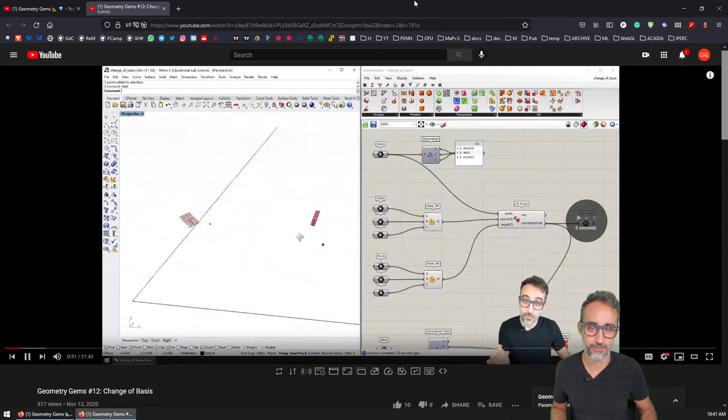And let's take a look. All right, so we did an intro, and then I had some drawings about what I wanted to explain. Yes, and then we just did it in C# scripting. Okay, so we can do that. All right, so then let's go to the whiteboard, and we're going to unitize a vector. So we need to draw a vector, and then how can I explain that?

So we have a vector, right? Like this, something like that. And that vector has three coordinates, which are going to be this one, and this one, right? So if we have a coordinate system like this, and like this, then it turns out that this vector has some kind of coordinates in this local system, correct?

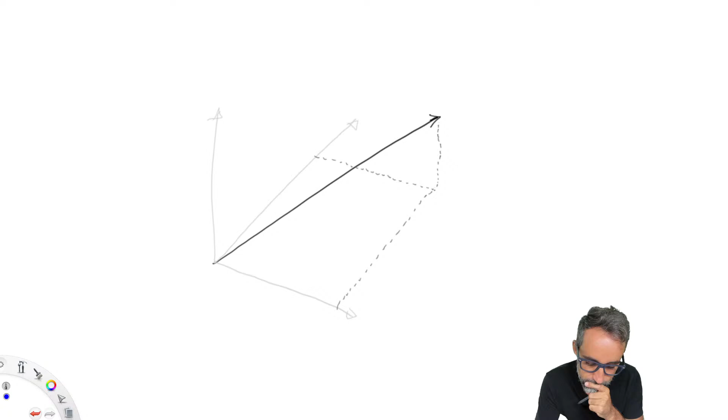And those are going to be the Z coordinate, so that's going to be, what is it going to be? It's going to be Z, and then this is going to be X, and this is going to be Y, right? Which is kind of weird to plot it that way. Am I liking this? So where do I want to go with this?

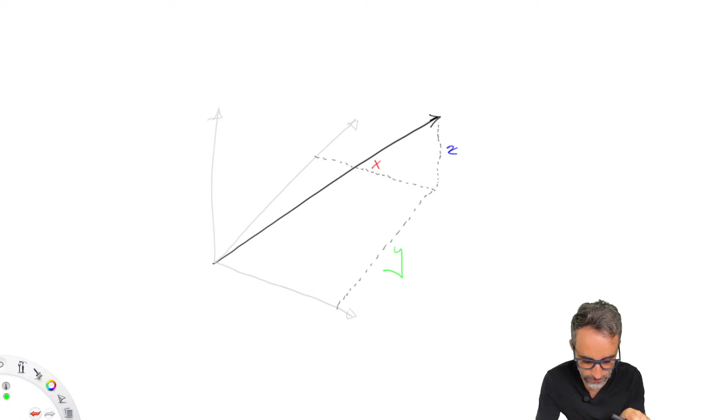So I want to say that it has particular coordinates, and then that the process is just as simple as figuring out the length of the vector. And once we have the length of the vector, creating a new vector where each one of the coordinates is divided by the length of the vector. Right? Do we have vector length geometry gems? Change of basis, distance between 2 points.

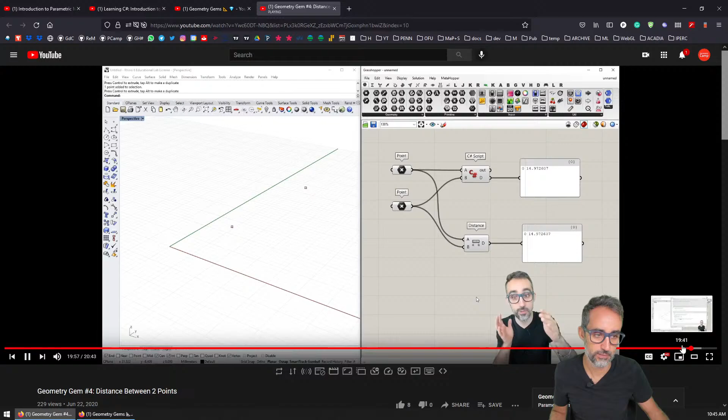We have distance between 2 points. I was inside of a square root. Maybe we should start with the vector length. Maybe that's not a bad idea. So let's start with calculating the length of a vector, and then we can move on to unitizing a vector.

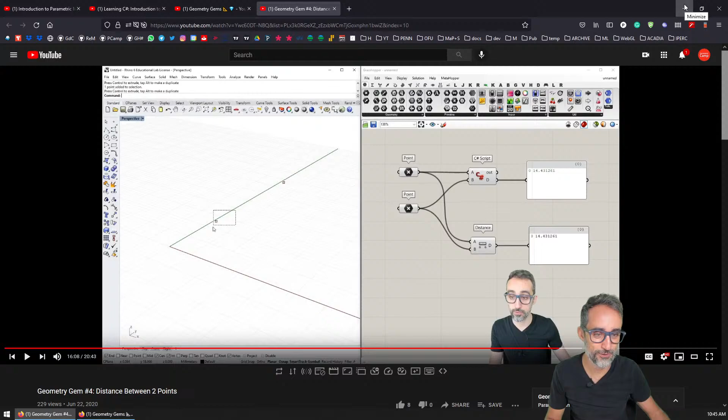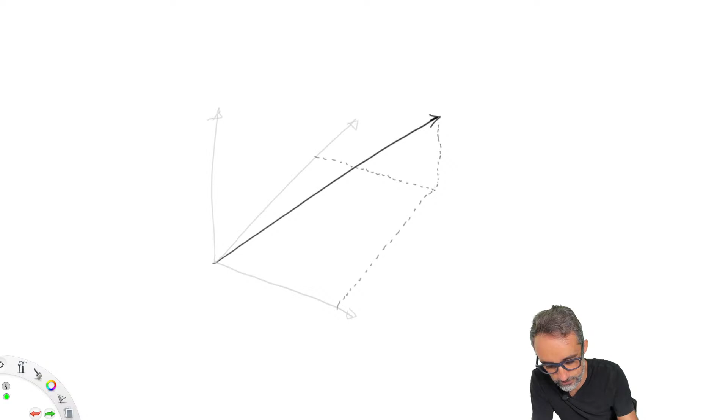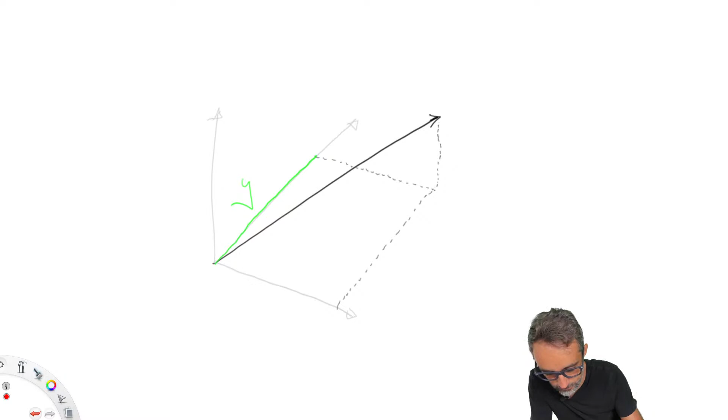Yes. So I'm going to go back here. And then I'm going to remove this. And then I'm just going to say that this is y. It's going to be the y coordinate. This is going to be the x coordinate. And then this is going to be the z coordinate. All right.

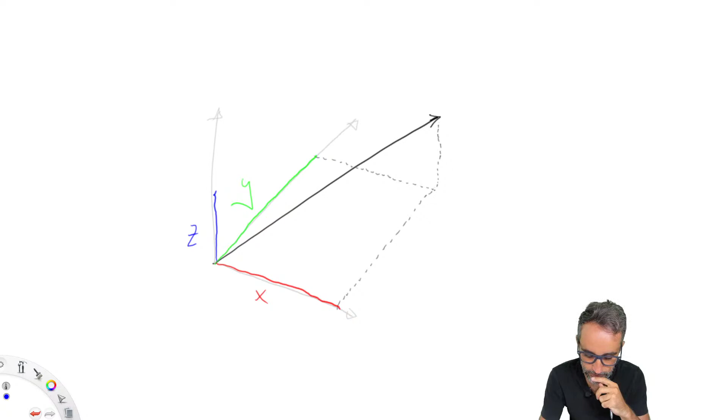And I would like to say that I'm a little fuzzy. You see why we need to go back into the mood, because I'm rusty. You stop doing this for a month and you get rusty all of a sudden.

Oh my god, I'm a little fuzzy, and this is being kind of boring, right? Okay. Let me start over again.

And then I'm going to do it with 2 dimensions. We have a vector, okay, and this vector has 2 coordinates. I have a vector, and the vector has coordinates, for example, x and y. And it turns out that those coordinates, if we place this vector at 0, 0, then those coordinates become x is here and y is here.

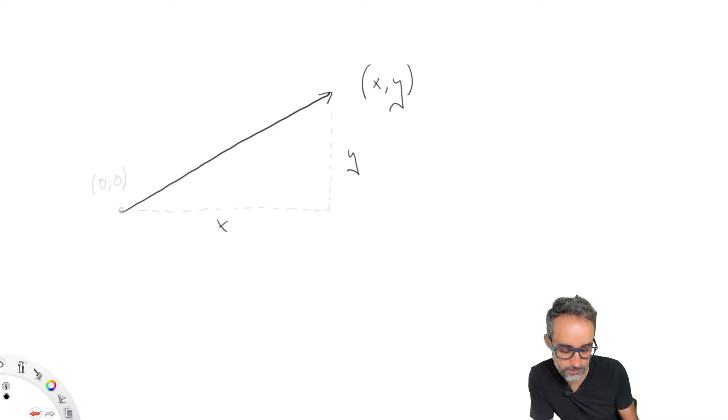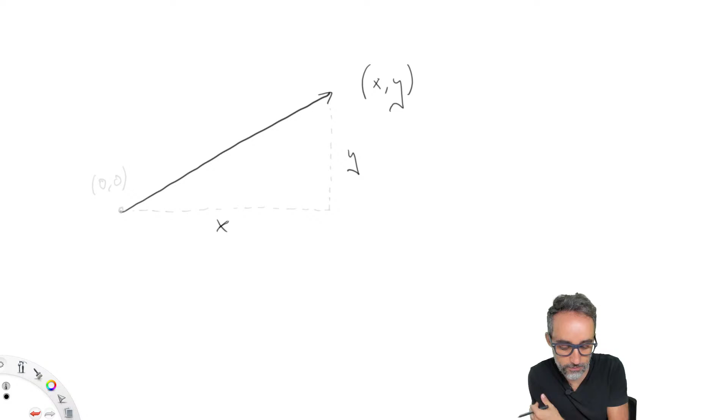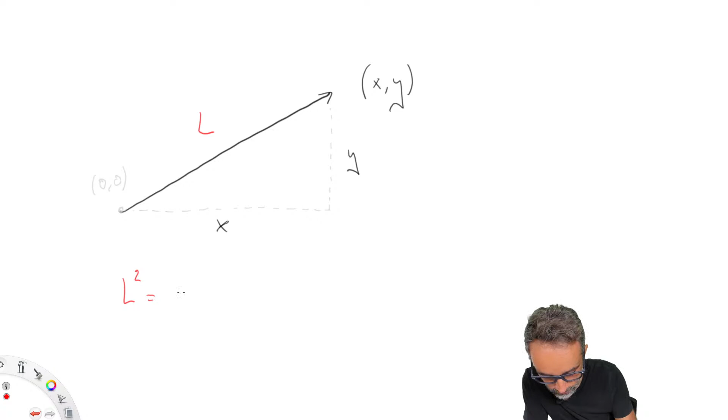And because of the Pythagorean theorem, we can see how, in order to find the length of this, it turns out that the square length of this equals the addition of the square length of the 2 sides, which means that the length of this object is going to be the square root of the x coordinate of the vector squared plus the y coordinate of the vector squared.

And it turns out that in 3D, this also works exactly the same. Oh, am I drawing on top of myself? I am. It also works exactly the same, x squared plus y squared plus z squared. All right. And it also

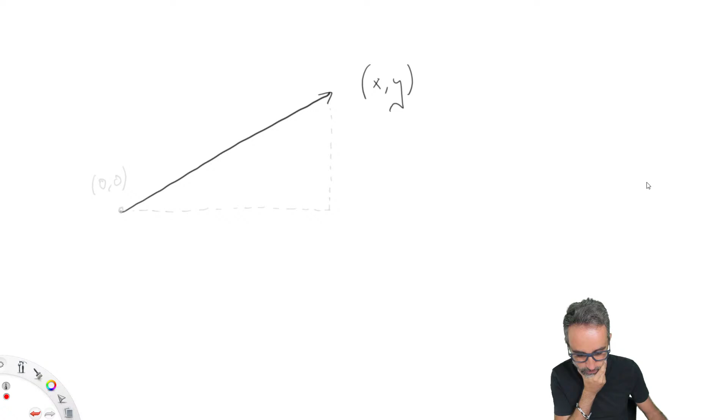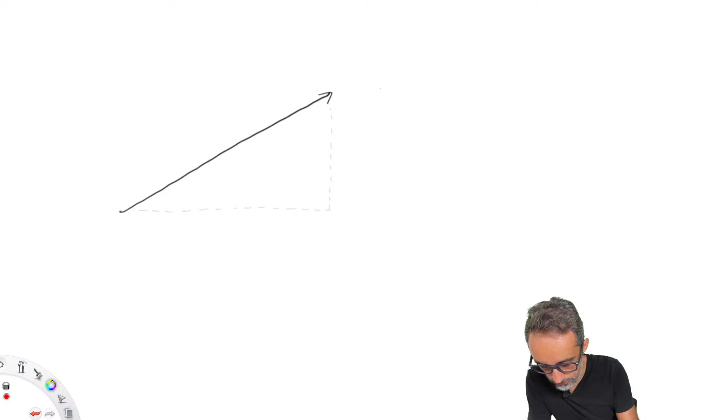Okay, so I'm actually going to remove this here. I'm going to delete this part here. And then I'm going to, where am I? Here. And then I turn this on, and I'm going to also remove this one here. And this one here. And I'm going to say that this is defined by x and y, and that is the same.

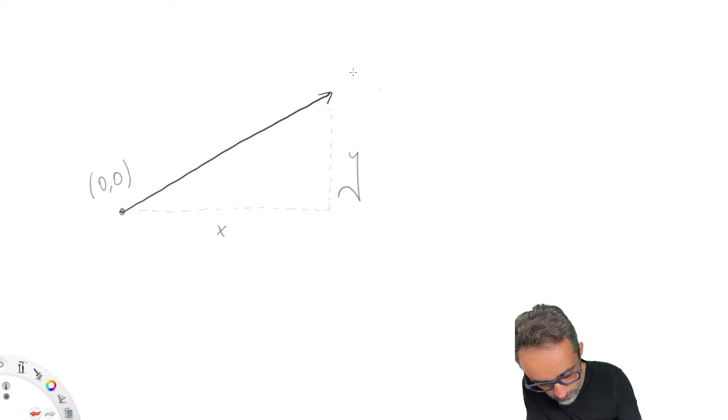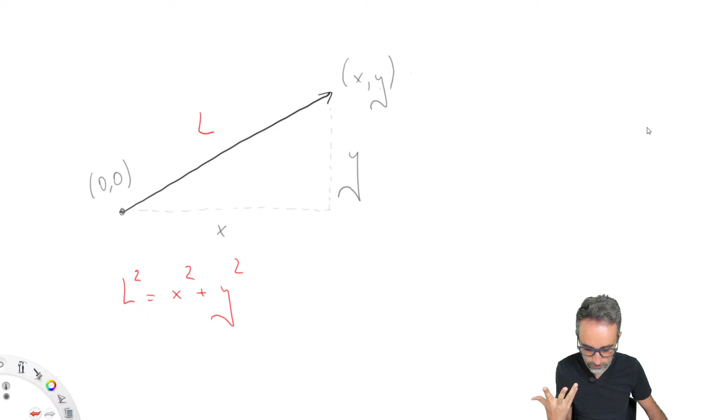This boils down to calculating the distance between 2 points that are on 0, 0 and x, y, for which we already have a geometry gem. And then after that, it's just as simple as saying, oh, no, we don't need this anymore. And then calculating the length can be as simple as calculating the distance between those two. But for the sake of making it easier, we're just going to the Pythagorean theorem.

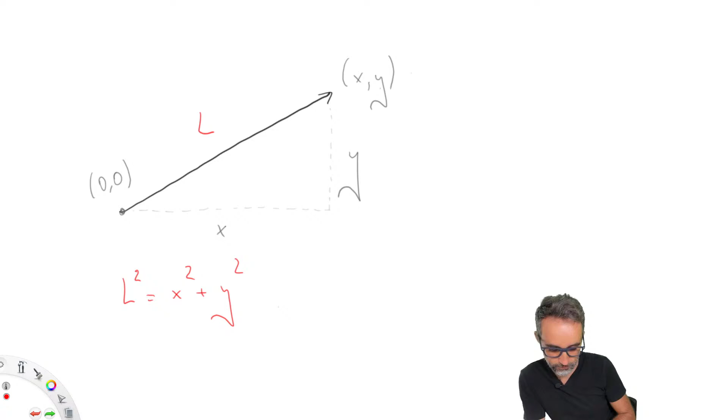All right, this is going to be extremely easy because it only involves applying the Pythagorean theorem in a very straightforward way. And let's think about that. If we remember, vectors are... starting over. I don't wanna start explaining what a vector is again. So let's start over.

Okay, this is going to be super easy because it's going to involve just very straightforward application. Starting over.

Okay, so this one is going to be super simple because it's going to involve simply applying the Pythagorean theorem in a very straightforward way. So let's take a look. If you remember, vectors are geometrical entities that are defined by the coordinates of each one of its components in three-dimensional space. So if we take a look at this case in two-dimensional space, we can see that if we have a vector with x and y components,

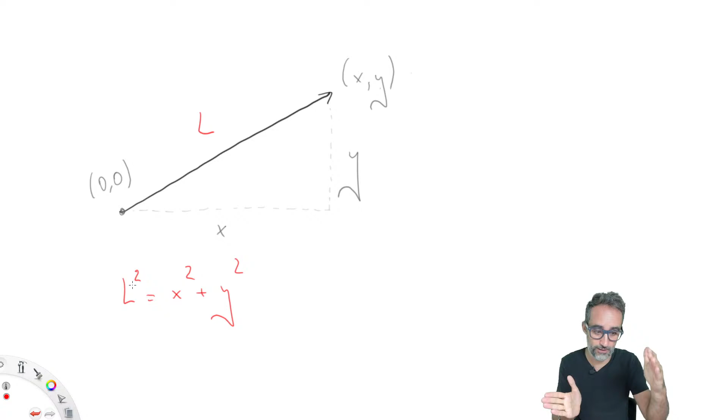So now you can see that what we have on the screen is a perfect square triangle. The Pythagorean theorem tells us that for square triangles, the square length of the longest side is equal to the sum of the squares of the smaller sides. So the square of the x coordinate of the vector plus the square of the y coordinate is equal to the square of the length of that vector. And therefore the length of a vector is the square root of the addition of the squares of both coordinates of the vector.

And this applies to 2D, but it also applies to 3D as well. If you have a vector in three-dimensional coordinates, you just have to add the z component to the equation. It's just as simple as that. So let's see an example of how to implement this using, in our case, C# scripting with Grasshopper. But this numerical relationship can be done in any platform or programming language you can think of. So let's take a look at how to implement that with code.

All right. Okay. So how do we implement that with code, right? That's a very good question. How are we doing? How's everyone doing? Oopsie. All right. So how are we doing? All right. So how am I going to prepare this?

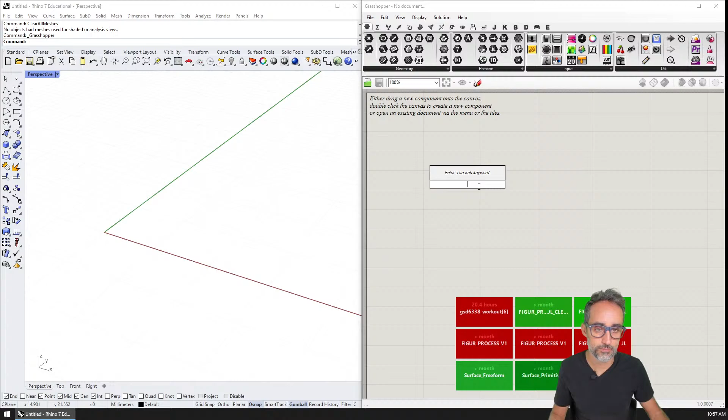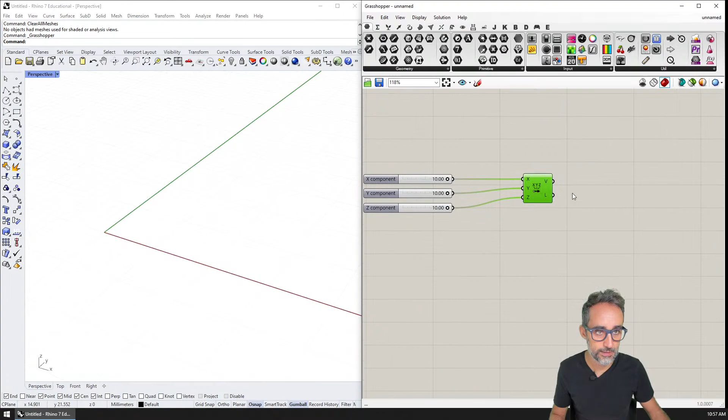So I'm going to drop here 3 sliders, for example. Those are going to be the x, y and z coordinates. And I'm going to create a vector from 3 coordinates, and then visualize. You're going to see that this vector is this vector here. And we're going to see also that the vector has this particular length here, which is already calculated by the component.

Okay, so we're going to visualize it just for the sake of it. Visualization here, anchor, and then a point in 0, 0. All right, we can see the vector there. All righty. And then what we want is to write a C# component that takes the vector and returns the length.

And so how are we going to do that? Should I do that in the video? I can do that while we are doing the video, probably. Yes. So let's do that during the video. All right. I'm going to save this somewhere. Geometry Gem 13, vector length.

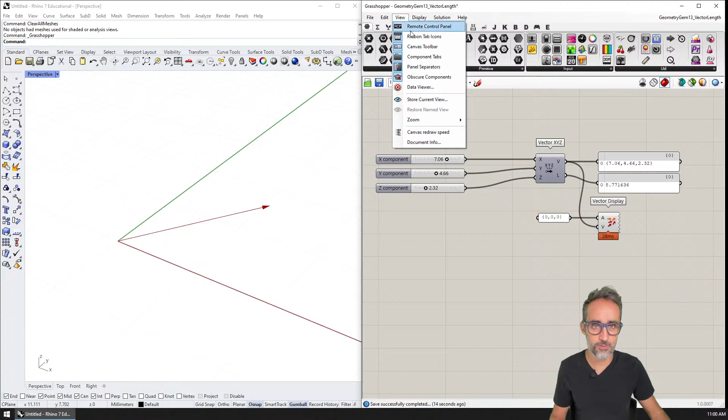Okay. Let's do this. Oh, and the bifocals thing. I actually installed something the other day. I've been getting a lot of suggestions from people from the community to use these other, maybe I don't have it installed. I was trying it somewhere. Well, I'm just going to use bifocals for the time being, but somebody gave me a suggestion for a really nice plugin to do the visualization part. Parachute. I think the one that I ended up liking was Parachute, because you turn it on and it works always, and you don't have to have a plugin installed. I can look that up later. Okay.

So I'm going to start now by explaining that we have the vector, we drop a component, we take each one of the components, and then we calculate the square root, and then we return that. And that's just as simple as that.

Yeah, you're right, Victor. That's multilingual, right? How awesome is multilingual? For all of you who don't know, multilingual is a component translation utility that Victor Lin has been working on for quite some time already. It's very, very nice. I contributed a little bit to that, to the Spanish translation, didn't I? Sunglasses is the one that I was suggested, but I did like Parachute better, I think.

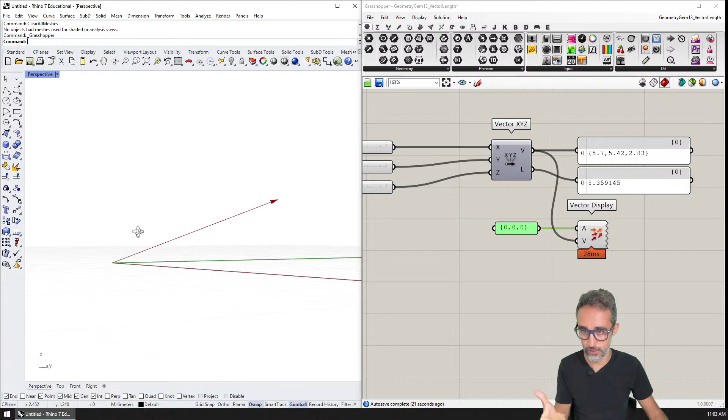Now, what's interesting is that the component in Grasshopper that creates vectors already gives me the length of this vector automatically. So this is going to be great for us to check if the computation that we're going to do is going to be valid. And then what we're going to do is create a C# script component that we're going to use to basically mimic this component here.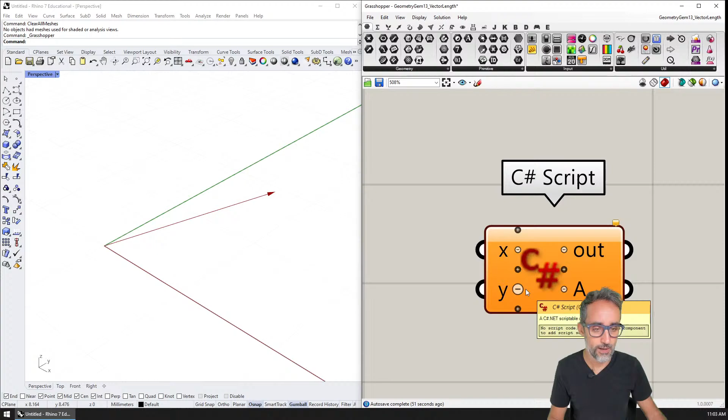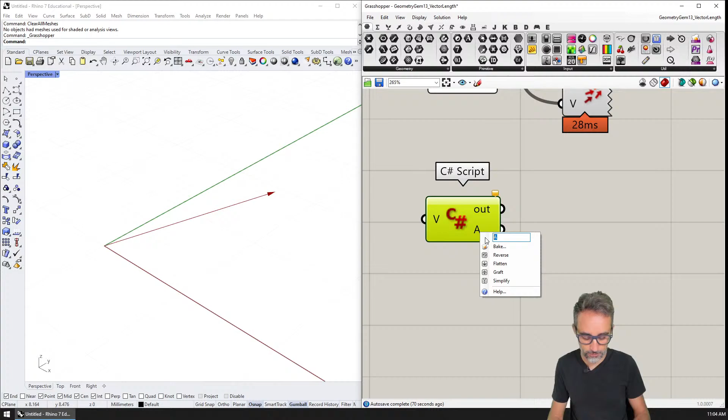So what I'm going to do is remove one of the inputs. I'm going to right click here and type V, and then I'm going to right click here and make sure that the input is of the type Vector3d, so that it is correctly casted. And then here the output, I'm going to right click and rename this output to length. So now if I plug this in here and input the vector, this component should perform the calculations to give me the length of that vector, which right now it's not doing. So now I'm going to double click here and open my C# scripting window where I'm going to implement that logic.

All right. And the logic is going to be super simple. The first thing that I'm going to do is write this very explicitly. I'm going to retrieve the vector coordinates by creating a variable of the type double, which is a number with a lot of precision, which is going to be called x, and that's going to be v dot, and then you see all the properties that show up. This is going to be the X coordinate of that vector. Then I can say double y is v.Y, and double z is v.Z. So now I have three variables that contain the values for the x, y, z coordinates.

Now what I need to do is compute the length, which I'm going to do by creating a new variable called length, and this is going to be Math.Sqrt. I'm going to compute the square root of x squared plus y squared plus z squared. Now, how do I square a number? Well, we could use the Math.Pow function, and we could say I want to elevate the value of x to the number 2.

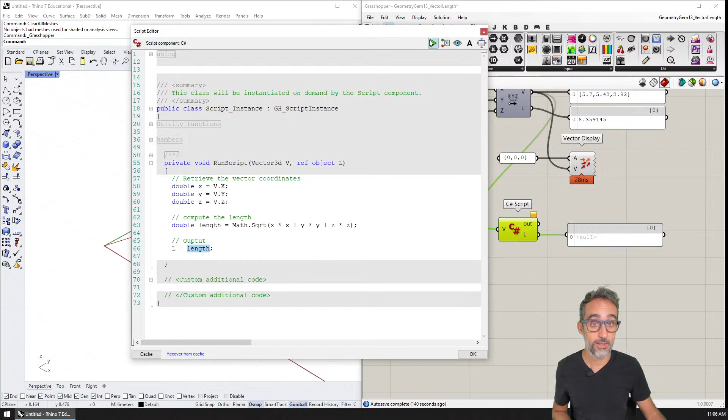Correct? And then once we have that length, then what I can do is I can output that value from the L object. So that's going to be L equal, the output of the component is going to be equal to that value that I just calculated here. And if I press play, you can see that, ta-da, the values actually match. And if I change any of the coordinates, those values actually match.

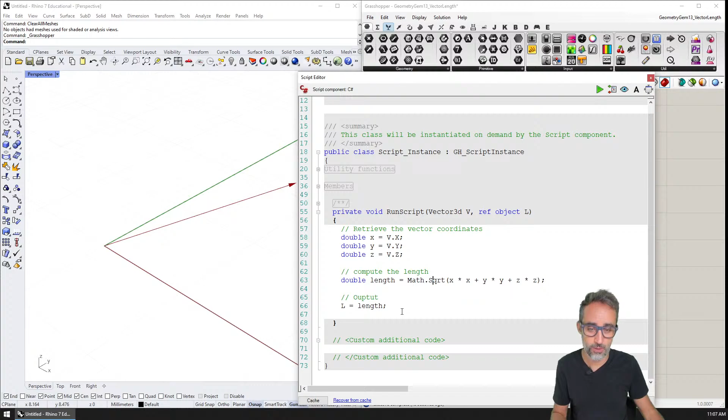All right. So that's it. It was just as simple as that. Now, because you know me a little bit now, I'm going to change the code a little bit to make it a bit more functional and nicer and reusable. So for example, I'm actually going to create a function that I can copy paste between my different pieces of code and that I can reuse.

So that function, I'm going to call it, for example, vector length. All right. And then that function is going to take as an input an object of the type Vector3d in this case, because we are in Grasshopper using RhinoCommon. If you're doing Unity, or if you're doing some other software, then the type of element will be slightly different. Okay. Now I'm going to name this lowercase v, for example. I'm going to open and close curly brackets.

And I need to remember that this function takes one vector and then returns a number with the length. So the return value has to be of the type double. And now inside of this function, I could basically just copy paste all of this and then say the return value is going to be length, and that's it. And then here for the outputs, I could say the output of L is going to be the result of calculating the vector length of V.

All right. However, quick thing, this needs to be lowercase because I renamed this argument as lowercase. So now this should work, no problem. All right. So that's great. I like writing very verbose, very explicit code when I'm doing these tutorials, but in case you want a little more elegant lean code, I'm not sure that's a good practice, but anyway, you could say, well, instead of retrieving this, why don't I just use them here right away?

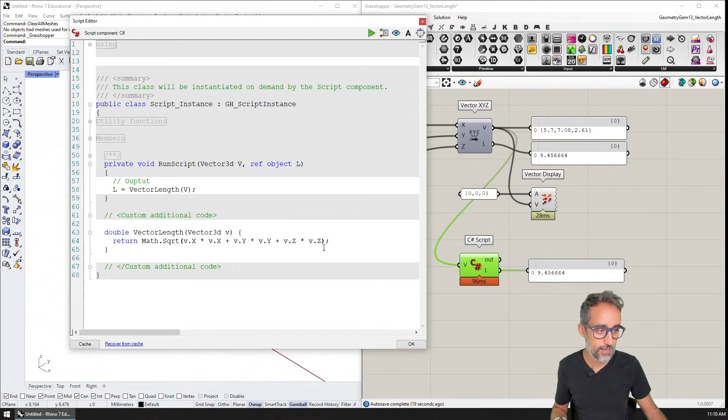All right. So I think that's all I had for today. And as you can see, this operation doesn't really need anything. This operation is just taking the coordinates and doing some arithmetic, some Pythagorean theorem with these values. If you wanted instead to use the functionality that is coming with Rhino and Grasshopper, then it turns out that Vector3d already has something that computes the length for you. So you don't have to write that on your own.

So this, for example, we could comment this. And then we could say, instead of that, I'm just going to use RhinoCommon's capacities and say vector has to have some kind of length property. So you can see here, there is a Length property that basically computes the length of this vector internally and returns that value. If I do that, that is also going to work. But in this case, now we rely on RhinoCommon to do that operation. In this case, we have manually done that operation ourselves.

Okay, so whichever way you find better. I like doing things myself very often, but I also don't like to reinvent the wheel every time. So it's up to you. Okay, but knowing where this comes from is very useful, in my opinion. All right. Thank you very much. This was how to calculate the length of a vector.

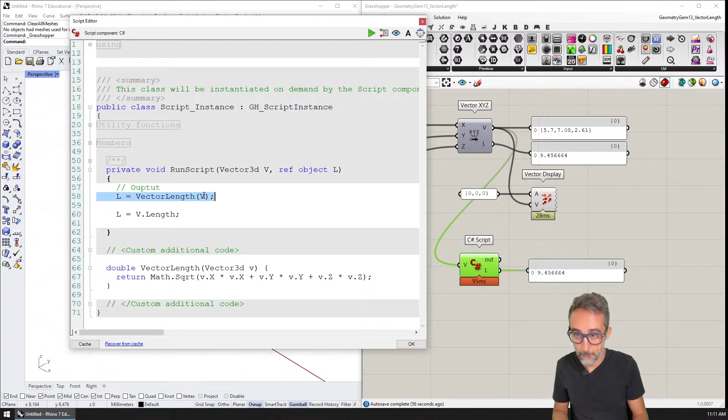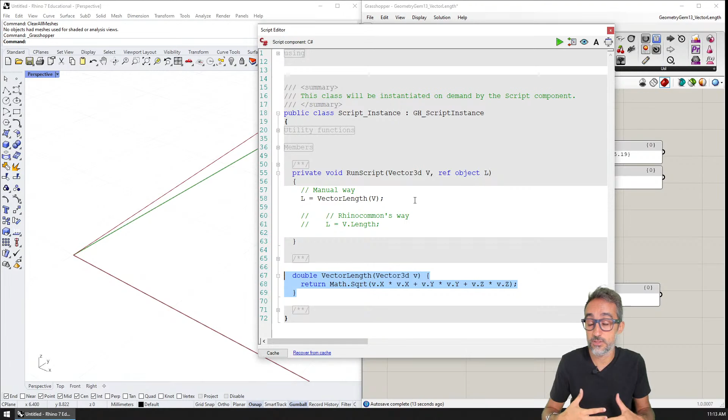Here I have a vector in 3D that I can control with X, Y and Z coordinates. Grasshopper automatically gives me the length, but I've written out what the algorithm to generate the length of a vector looks like, which is based on the Pythagorean theorem. Let's get hands-on. I'll first explain conceptually where this comes from, then how to implement it in computer code.

All right, so that was computing the length of a vector. The next thing we want to do was the other geometry gem: unitizing a vector.

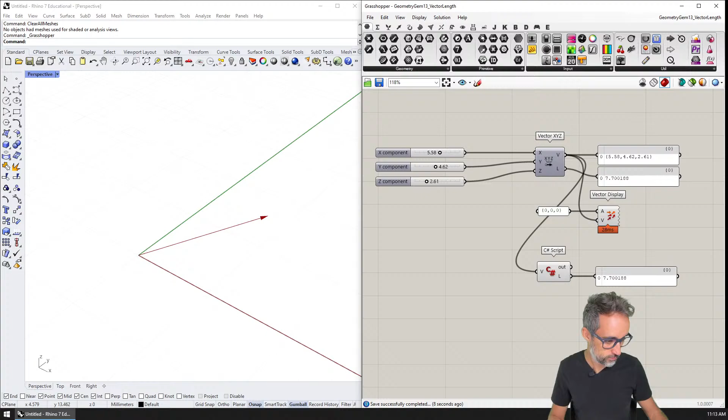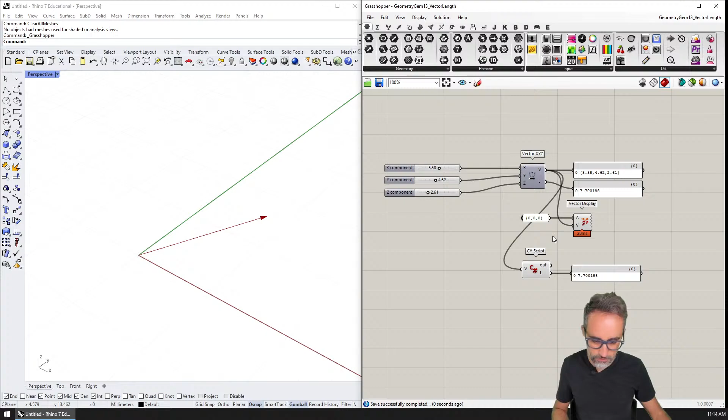Okay, so I may want to use this one. Okay. Let me save this and let me write myself a note here. Let me write myself a note here. That

All right, what else? We were going to do how to unitize a vector.

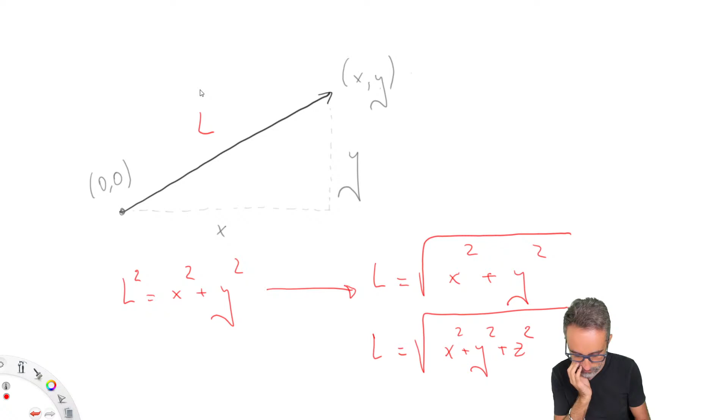I think I might just use this diagram, a similar diagram to this one. Okay, so let me just save this diagram here. And then let me make another one. Save. Wait. Save as. Okay. All right. So that. Okay. Here. Oops. Oopsies. All right. Where is the drawing thingy?

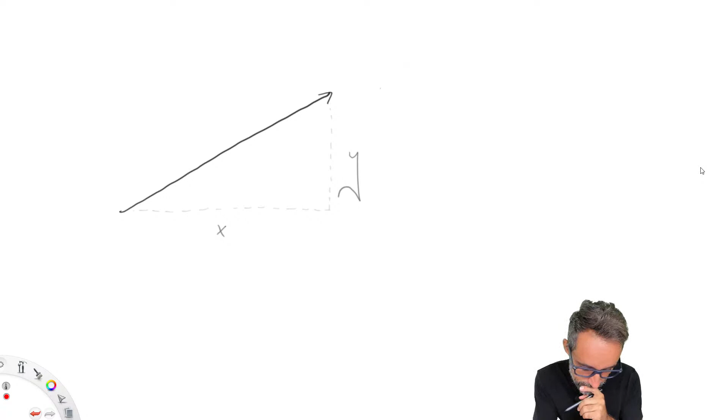How's everyone holding on? Is it hot wherever you are? Because it's very hot here in Cambridge today. The weather has been super nice, and now today it's not great.

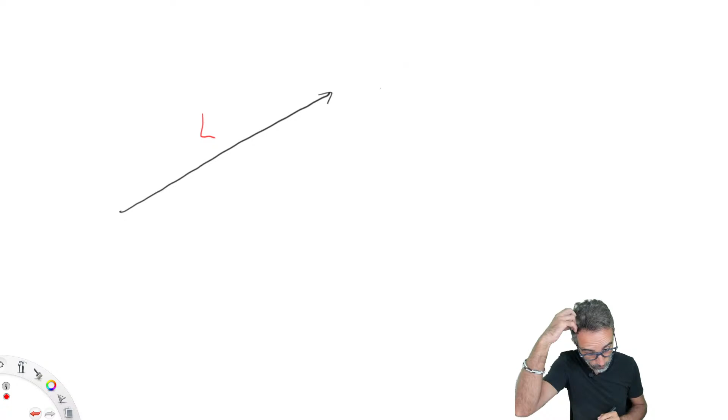So we have this, and what I want to say is that I have this, and then this vector has whatever length. And then what we want to do is we want to be able to find a new vector.

Sorry, I'm actually going to show the length of this vector, which can be whatever. And then what I want to do is create a new vector, something like this, where I know the length is going to be equal to 1 unit.

Except during the winter, which is what, 75, 70, which is still super warm for Boston standards.

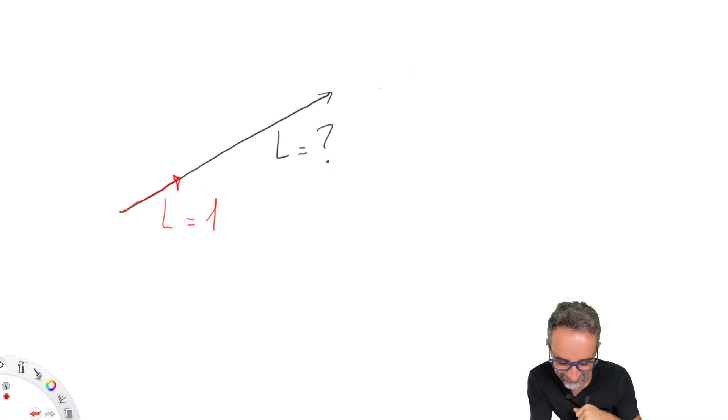Actually, let me undo this. Okay, I'm going to draw all this stuff here above.

The length of this vector is going to be whatever. And then what I want to do is create a new vector. And this vector has to have a length of 1 unit.

It can get to the 60s. Come on, cry me a river, Hector. That is springtime here in Boston.

Anyway, so what are we going to do with that? So what that boils down to is that we have X and Y. And then when we do that, then...

How do you represent a unit vector? I forget what the notation was. I may want to use that notation.

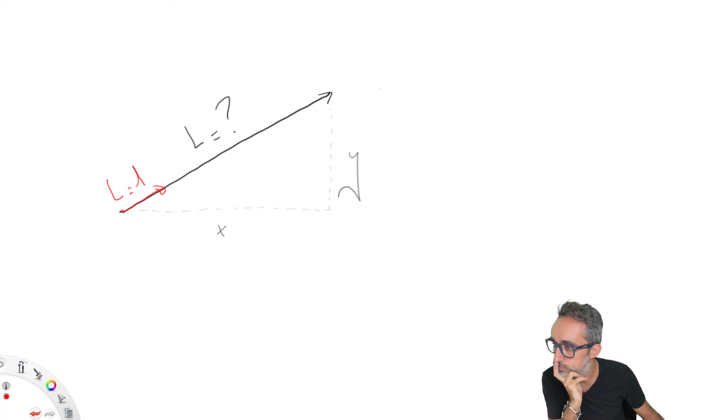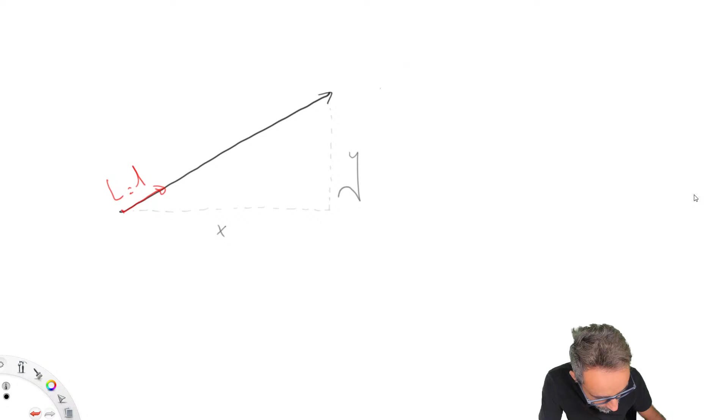Okay, so let me just delete. Have I told you how I'm really tired of this sketching program that I use? How I keep complaining and then I never actually.

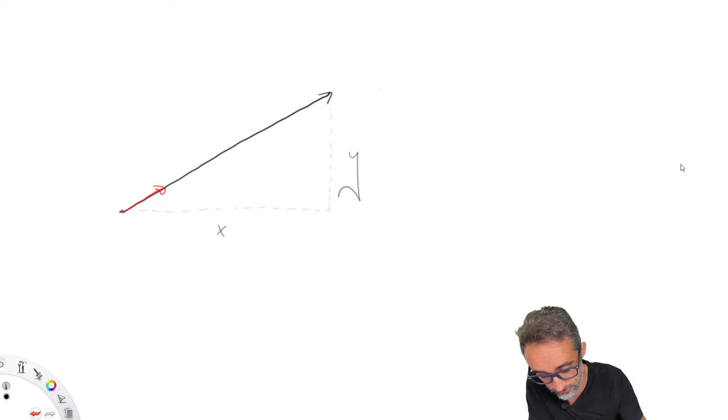So I'm going to say that this vector is a vector. It's called vector v. And we're going to say that the length of vector v is whatever, can be whatever.

Now what I want is to create a new vector, and that vector is going to be called v, lowercase v, and I'm going to give it a hat. What I want to say with that is that the length of v hat is going to be equal to...

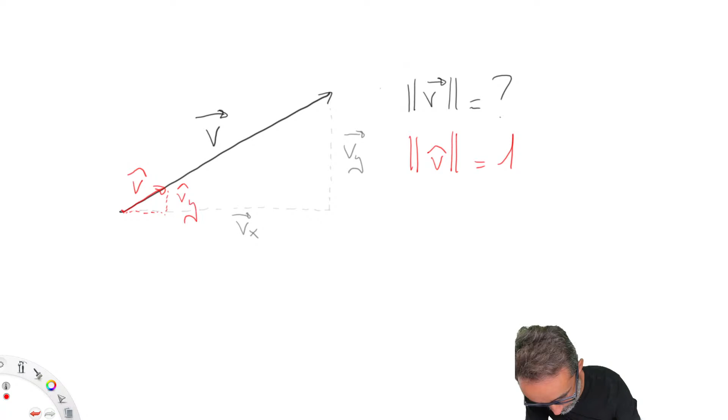And it turns out that here we can have v hat y, and v hat x. And then I want to explain that you can see how there's a rule of proportionality.

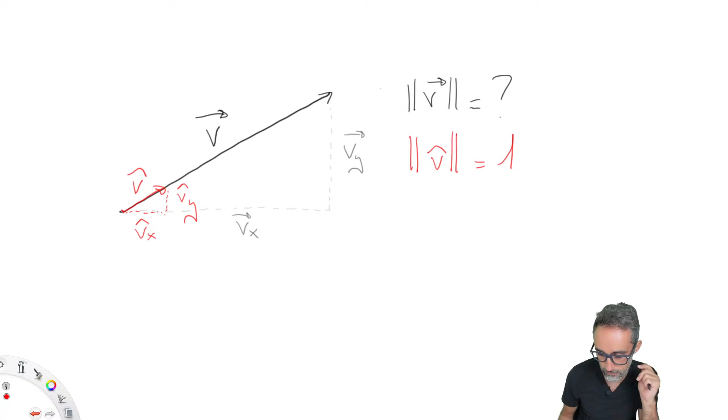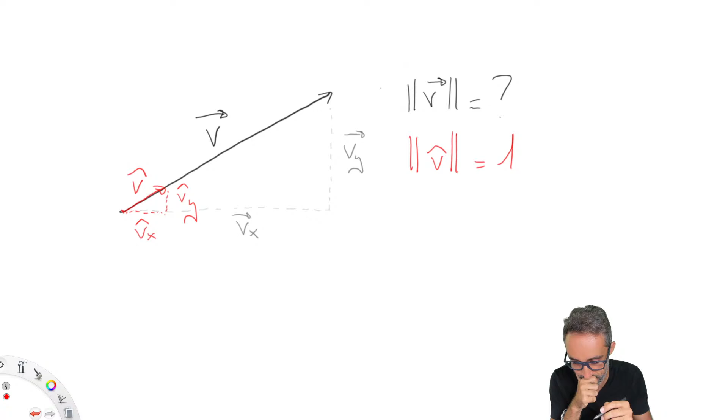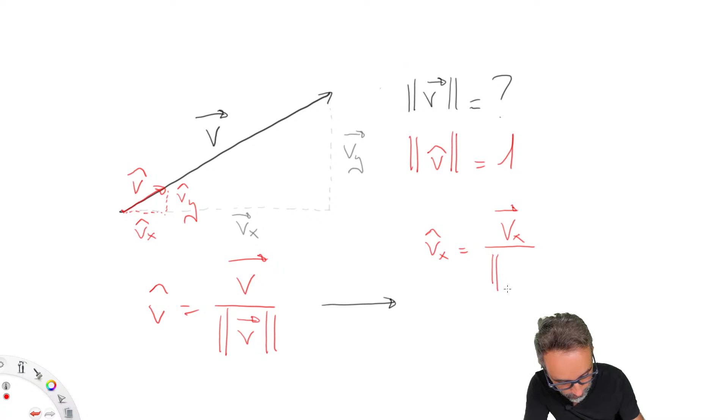So it turns out that in order to calculate v hat, it's going to be equal to the v vector divided by the length of the v vector. What this also means is that v hat x is going to be equal to v x divided by the length of v, v hat y is going to be equal to v y divided by the length of v, and v hat z is going to be equal to the z coordinate of the vector divided by the length.

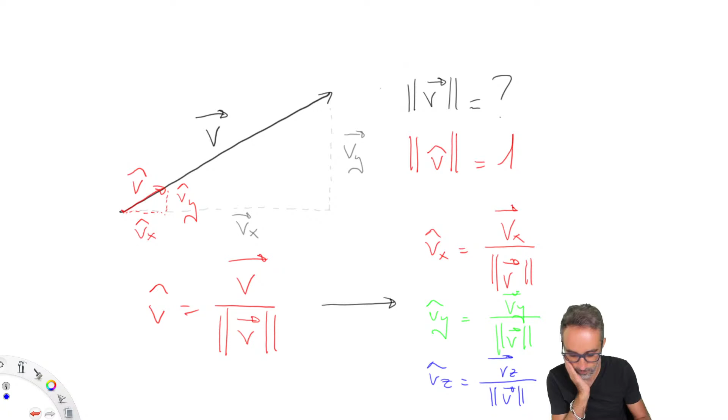And perhaps we can make this look better. I think this starts looking better.

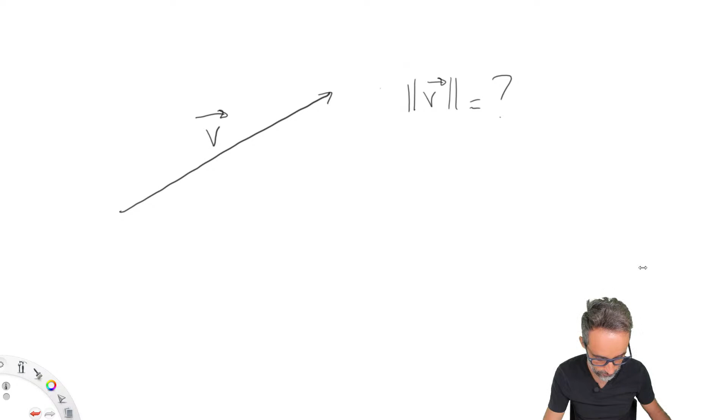I have to remember in the intro to explain that normalizing a vector is a really, really common operation to do, because working with unit vectors is a very nice thing. I need to remember to do that.

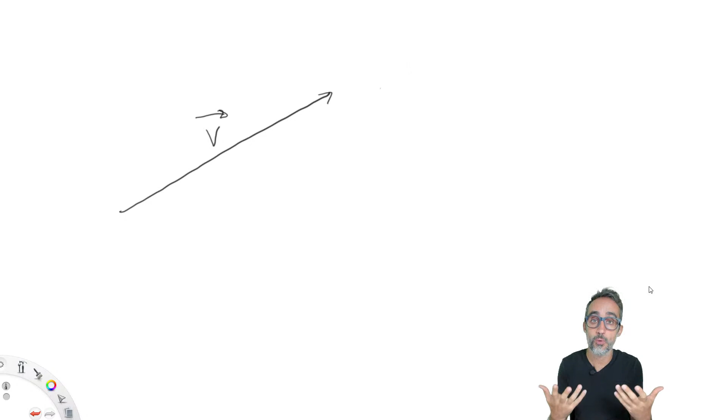Wonderful. So let's break down the rules for unitizing a vector. Let's say we have any vector in three-dimensional space, and we're going to name that vector v with an arrow. This is a very common way of notating vectors. We're also going to assume that the length of that vector is whatever value - we don't really know, we can find it, it's very easy to compute, but it's probably not the value of 1. I'm going to denote the length of a vector by using these double vertical bars around the vector name. So this expression means that the length of vector v is whatever.

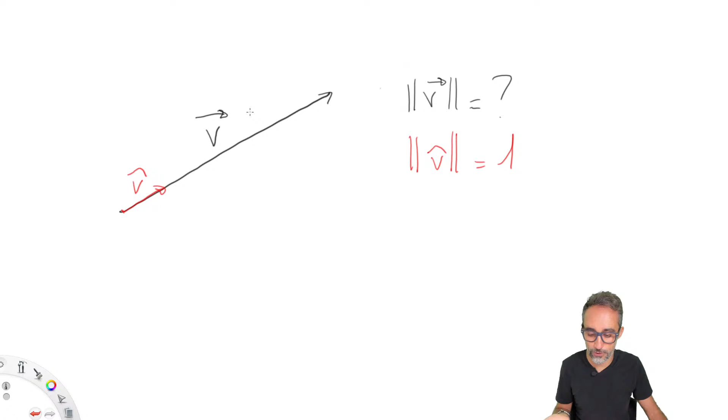And then what we want to do is from vector v, find a new vector that we're going to call v hat. The hat is a very common notation for unit vectors. We want to find a new vector v hat that has the property that it has the same orientation and direction as the original v vector, but the length is going to be 1 unit in whichever system we're measuring. It doesn't really matter - we want to find what the coordinates of vector v hat are so that the length of that vector satisfies that it's equal to 1. In other words, we want to turn vector v into a vector with the same direction and orientation, but with only a length of 1.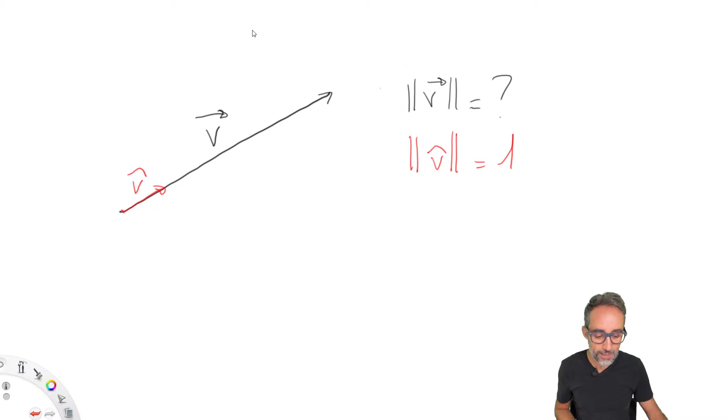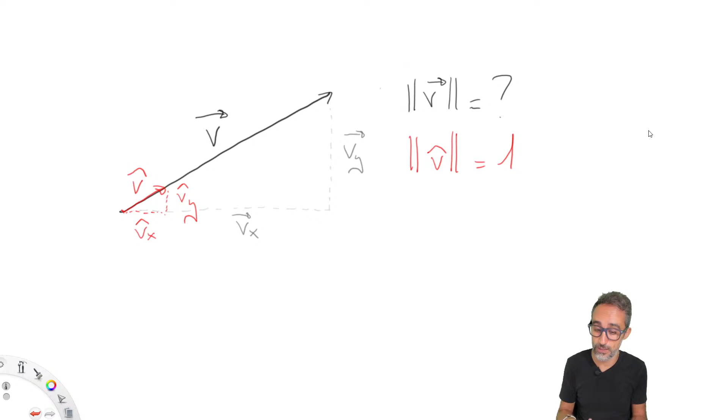How can we do that? Well, vectors have x, y and z coordinates, whatever those are. I'm doing this diagram in 2D, but everything I'm explaining will work in 3D the same way. What we want is to find the coordinates of a new vector in the same direction but with only a unit length. If you think about this, you can see from this diagram that there is a very clear rule of proportionality between the original vector and the unitized vector. If the original vector has a magnitude of 2 units, then to find a vector of unit 1, you have to divide each one of the coordinates by 2. Or if you have a vector of 5 units long, then to find the unit vector you divide each one of the coordinates by 5. You just need to shrink down those coordinates by a factor of the length.

So what that means technically is that in order to find a unit vector v hat from any other vector, we need to take the original vector and divide it by the length of that vector. Whatever the length of this vector is, we divide it by its own length to find the vector with the same direction but just 1 unit length. What does dividing a vector by a number mean? Practically, it means to take each one of the coordinates of the vector, which are numbers, and divide that coordinate by the length of the vector, then use those coordinates to assemble the new unit vector.

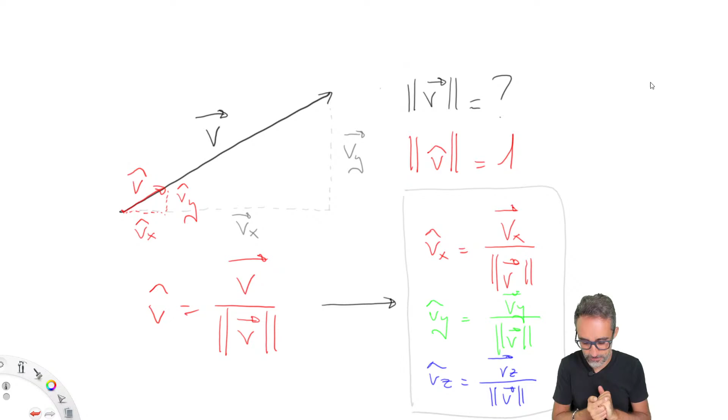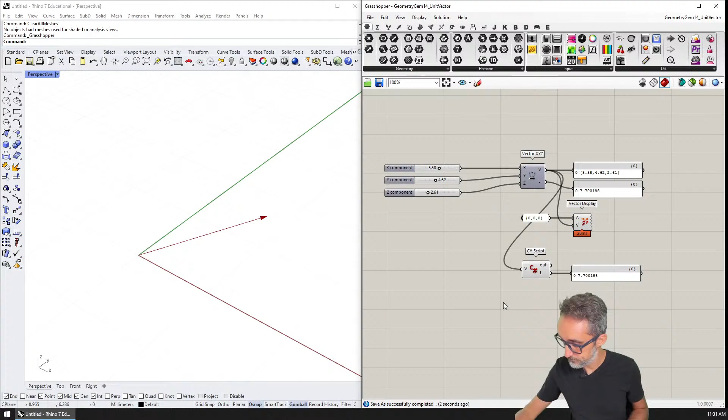All right, so we're here now, and we're going to save this file as, okay, unit vector. And what I'm going to do is disconnect this.

Okay, so I have this vector that I'm displaying here, and then I'm going to unitize it - unit vector. Then I'm going to make that vector unit, okay, and I'm going to copy this here so we can see the results.

Okay, and I'm also going to just copy paste this in here. Oops, oopsies. So that we can see the unit vector here.

And then we're just going to write here a component that is going to mimic this one here, which is taking the vector and returning a new vector, which is the unit vector. Okay, so I can explain that now.

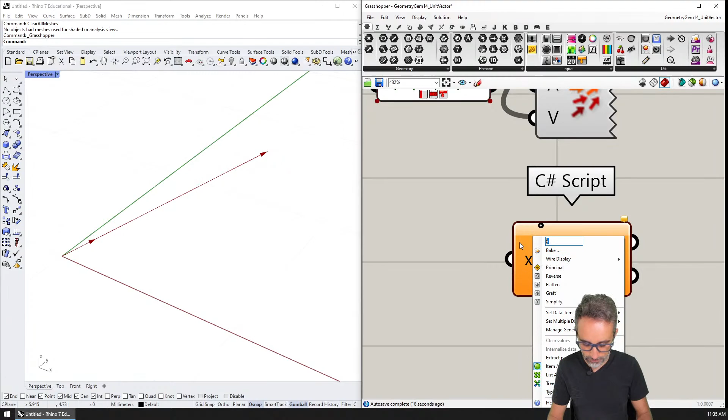Anyway, so what we're going to do is try to mimic the behavior of this component by writing a C# script component that is going to take one vector. I'm going to call this vector in, all right, and make sure I right click, type hint, vector 3D, so this is of the type vector.

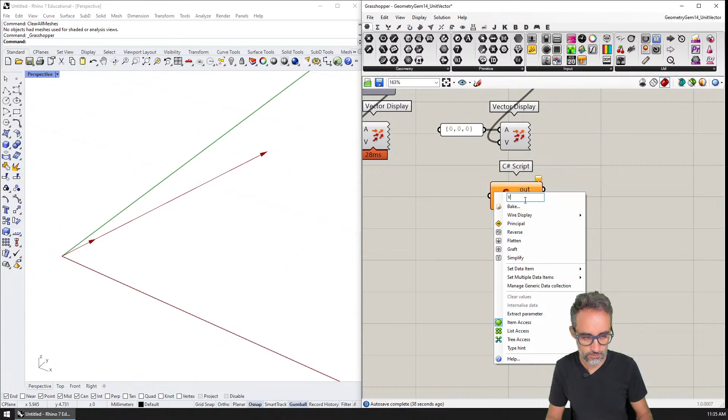And then the output is going to be v out, or v, well, I can do v unit, for example, and this is going to be v, simple v. And then I'm going to plug this in here, copy and paste this. And then what I would like to do - oops, sorry, no, I'm going to plug in here.

I'm going to take the original vector and write here some code that is going to return a new vector with unitized coordinates. So how are we going to do that? It's going to be super easy.

The first thing that I'm going to do is compute the length of the original vector, all right? And how can I do that? Well, I'm going to create a double variable that is going to be called length, and I could do it two ways. So I could do, for example, because I am working in Grasshopper and Rhino, I know that vectors...

For example, v, which is the input - we know that vectors have a property called length that I can use to recalculate and read that vector length right away. However, in my previous geometry gem, where we calculated the length of vectors, I wrote this function called vector length that takes one input vector and returns its length, which I kind of like, so I'm going to reuse that.

So I just copied that, I pasted that function here, okay? And then what I'm going to do is I'm going to use that function, so vector length, and then I'm going to pass vector v, and that is going to give me the length of that vector, all right?

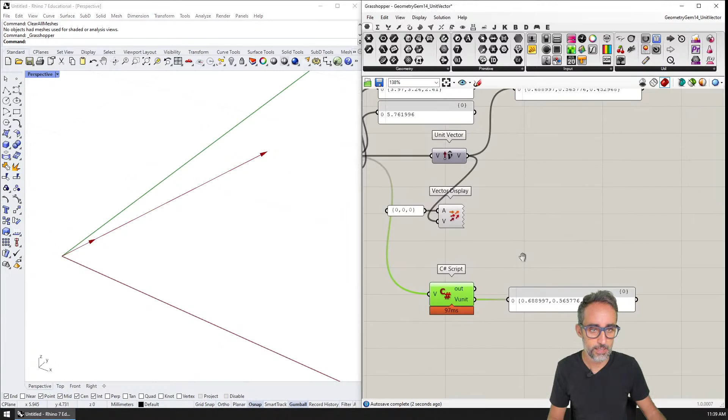And then I'm going to output that through the component, which is called VUnit, is going to be unit vector, that new vector that I just created over here. So let's see if this works. So I'm going to generate that, okay? And then I'm going to compare these two, and it looks like they are pretty identical. So that's pretty good.

And just to double check, this is the vector length script that I did in my previous geometry gem when we were calculating lengths of vectors. So I'm going to plug that in here, and you can see that it tells me that this unit vector has a length of 1. So it looks like things work. And then if I modify any of the input components, you can see that the vector changes, but the length is still always 1.

Can you see that on the screen? Yes, you can see that on the screen. Okay, so that was unitizing a vector. Super simple. Remember, the way to unitize a vector is to create a new vector which has coordinates equal to the original ones divided by the length of the original vector. As simple as that. Okay?

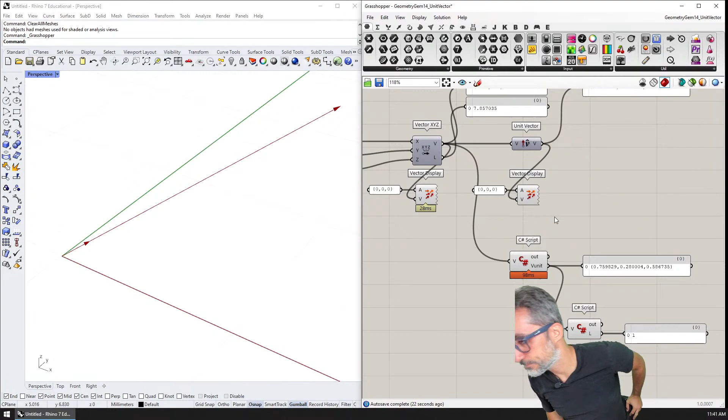Okay, so we're going to record a chunk where I explain how to do this the Rhino way as well.

Now, we have learned how to do this the manual way, and you know me already. This is probably something that we want to abstract into a function. So I would want to create here a function that returns a unit vector. So for example, given a Vector3d object lowercase v, it is going to return another Vector3d, which is the same vector, but in a unit way.

Okay, and then I can just copy paste most of this, except for this that I have to rename to lowercase v. All right, so here I can calculate the length using this function that has to be available, okay? And then what I could do is I could say, can I calculate the unit vector of uppercase V?

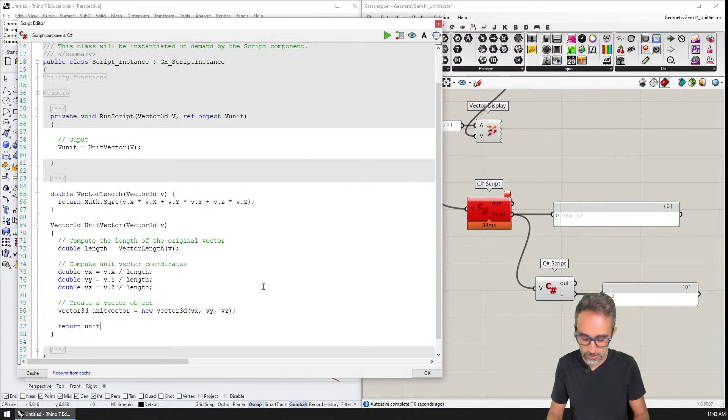And that should give me the same result, except that the name V does not exist in line 72. Yes, I forgot to replace this one here. So I'm going to replace that one there, and then it's still not working. Oh yeah, because I forgot to return the vector actually. So return unit vector. All right, and now it works, and it's a unit vector, and this is the same

numbers. So that's great. So now we have this in a form which is a function that we can reuse and share between different parts of our code. Now, this is the manual way of unitizing a vector, but for those of you who are Rhino and Grasshopper users, you may want to learn the way to do this with RhinoCommon. So this is going to be the manual way, and here I'm going to say the RhinoCommon way. And the RhinoCommon way is doing the following.

So the RhinoCommon way is we can take the vector v, and then we can unitize it, and there is a function that lives inside of vectors. And what this is going to do is take vector v and unitize it in place. In place means that it's not going to return a new vector that is now a unit, the way we have done it in our function, but it's going to take the vector v and modify that vector. Okay, so we're going to lose, in a way, the original vector for this new unit one.

So it's a slightly different behavior, and the pros and cons is that maybe it's faster and a bit more memory efficient, but we also lose, if you will, the original data. So if we ever need to go back to the original coordinates for whatever reason, we can't do that because we have actively changed this vector. So that's one way to see it.

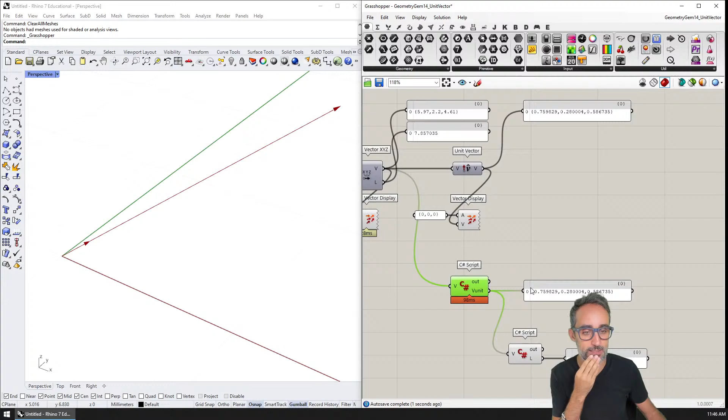Okay. So for example, let's say that I'm going to run this code. So v unit is going to be equal to this new vector v that I just unitized, right? And you can see that right now it's working and it's giving me the same result. But if I now take all the coordinates of this vector and I zero each one of them, all of them together, then guess what's going to happen? I get here an error that says cannot unitize this vector.

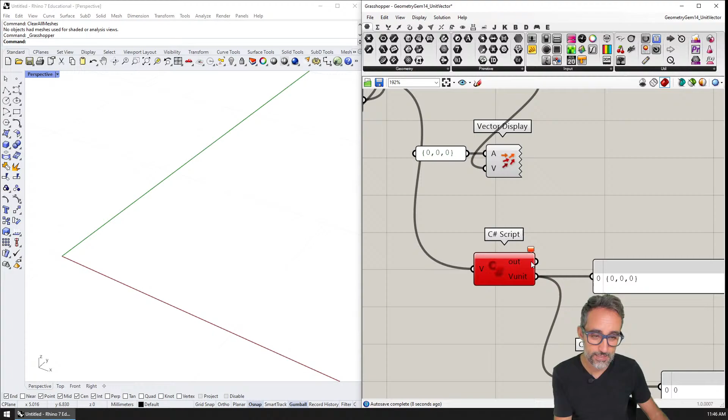And why is that? Well, if you think about it, a 0, 0, 0 vector that has no length or no direction whatsoever cannot be unitized because the result has infinite solutions, if you will, because the vector could be pointing anywhere, because it's not pointing anywhere really. It doesn't have a direction. That is the geometric interpretation.

If you want the mathematical interpretation, the algorithm for unitizing a vector involves dividing each one of the coordinates by a number, the length of the vector. It turns out that if this length happens to be 0, then we know that dividing a number by 0 is an indeterminacy. It's a calculation that cannot be done, that returns infinity or other kinds of things. So that cannot be computed, and therefore there's no solution to that operation.

That is why the RhinoCommon function doesn't really return a vector. What it returns is a Boolean flag telling us if we did successfully unitize that vector or not, if it was possible. Okay? All right. Cool. So that was vector unitization, both the manual way and the Rhino Grasshopper way. Remember, unitizing a vector is just as simple as taking each one of its coordinates, dividing them by the length of the vector, and creating a new vector with those divided coordinates.

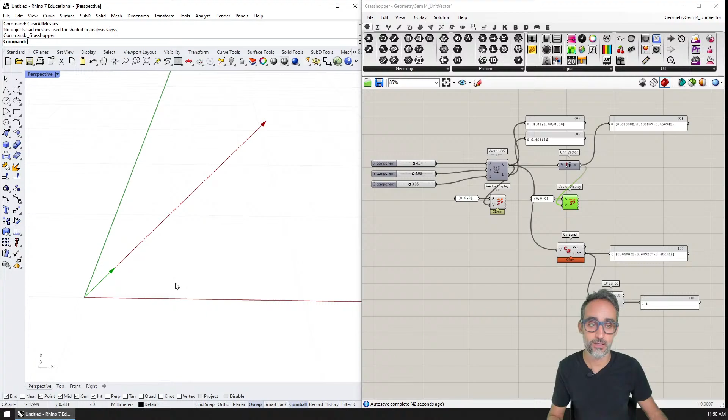Hi, this is Jose Luis here at Parametric Camp, and let me welcome you to another geometry gem where we're going to learn how to unitize vectors. And unitizing vectors is the process of taking a vector that has whatever direction and orientation in three-dimensional space and creating a new one that has the same direction and the same orientation, but whose magnitude is going to be the unit, or in whichever units you're measuring that.

We're going to be implementing this in Grasshopper for Rhino using the C# scripting language, and we're going to do it both the manual way, so I'm going to teach you how to do this from scratch so that you can apply this in any other environment, or if you're more Rhino inclined, I'm going to teach you how to use RhinoCommon to perform that operation automatically. Okay? So, but first, before we do any of this, as usual, let's take a look conceptually at what unitizing a vector is and how the algorithm works.